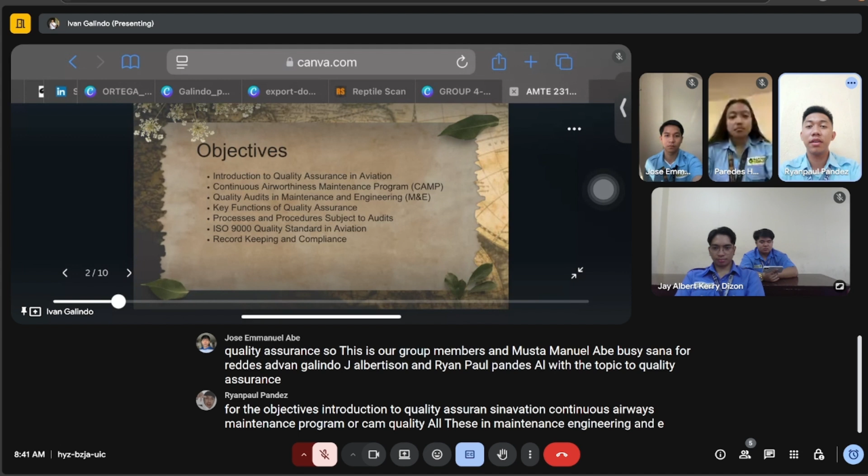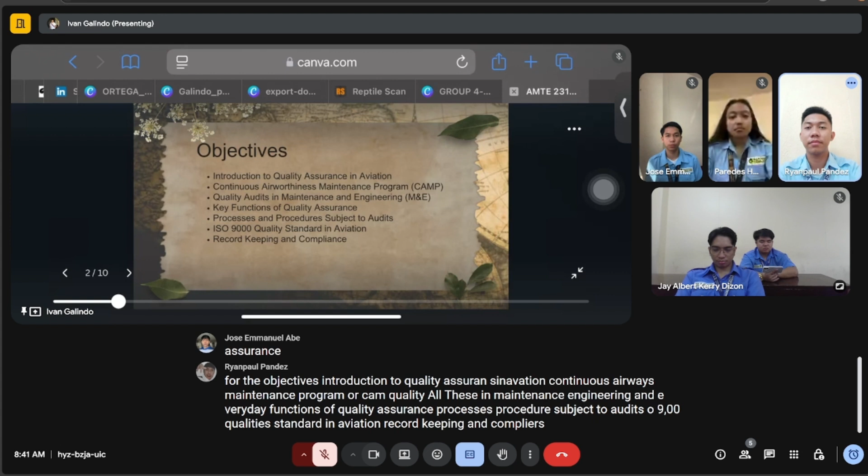For the objectives: Introduction to Quality Assurance in Aviation, Continuous Airworthiness Maintenance Program, or CAMP, Quality Audits in Maintenance and Engineering, M&E, Key Functions of Quality Assurance, Processes and Procedures subject to audits, ISO 9000 Quality Standard in Aviation, Record Keeping and Compliance. Next slide, please.

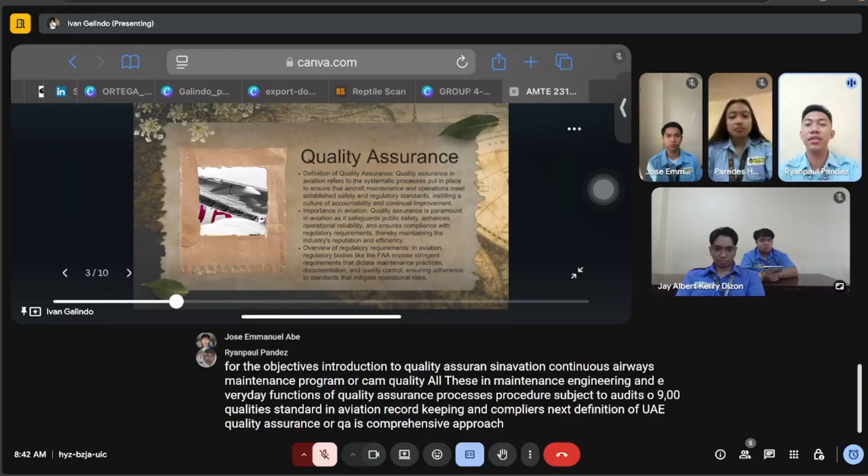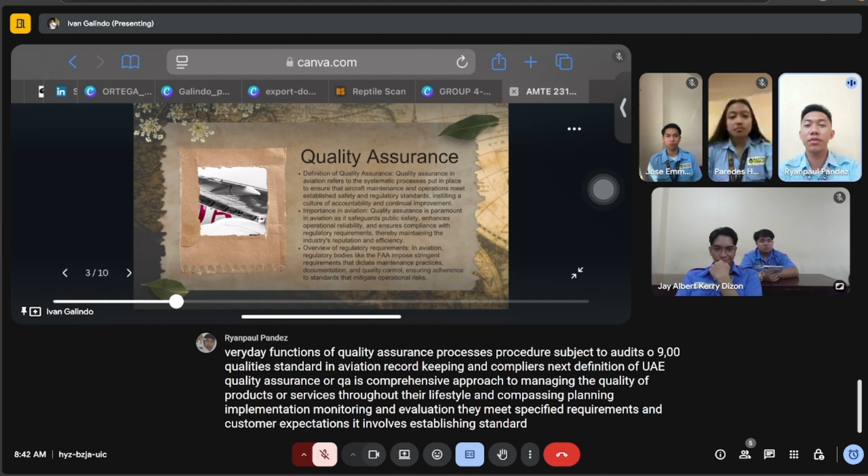Definition of QA. Quality assurance, or QA, is a comprehensive approach to managing the quality of products or services throughout their life cycle, encompassing planning, implementation, monitoring, and evaluation to ensure they meet specified requirements and customer expectations. It involves establishing standards, procedures, and processes to prevent defects and other issues before they arise, ultimately aiming to provide confidence to stakeholders that a product or service is of acceptable quality.

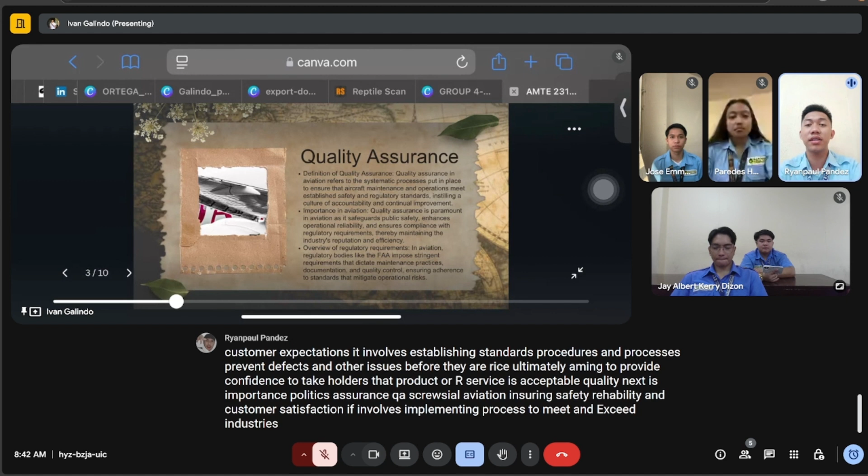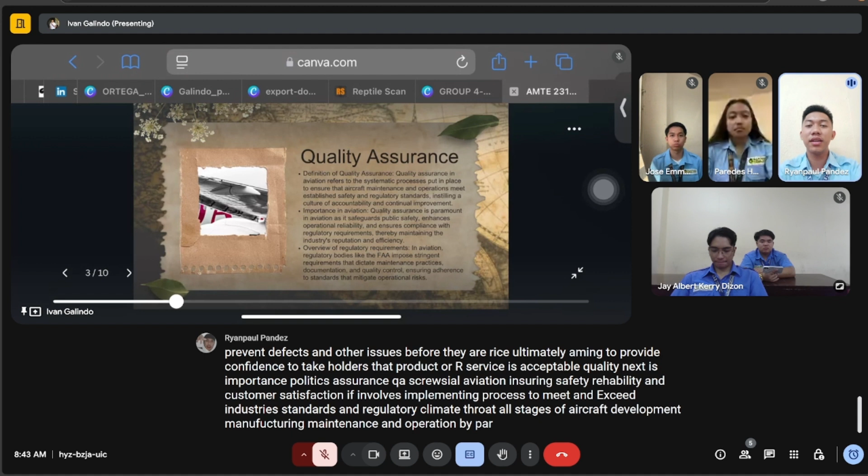Next is importance. Quality assurance, QA, is crucial in aviation, ensuring safety, reliability, and customer satisfaction. It involves implementing processes to meet and exceed industry standards and regulatory requirements throughout all stages of aircraft development, manufacturing, maintenance, and operation. By prioritizing QA, aviation companies can enhance safety, build trust, and maintain a competitive edge.

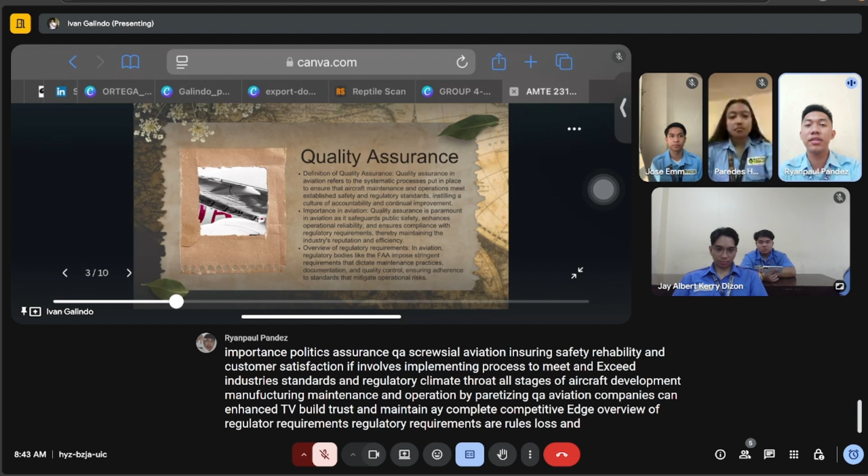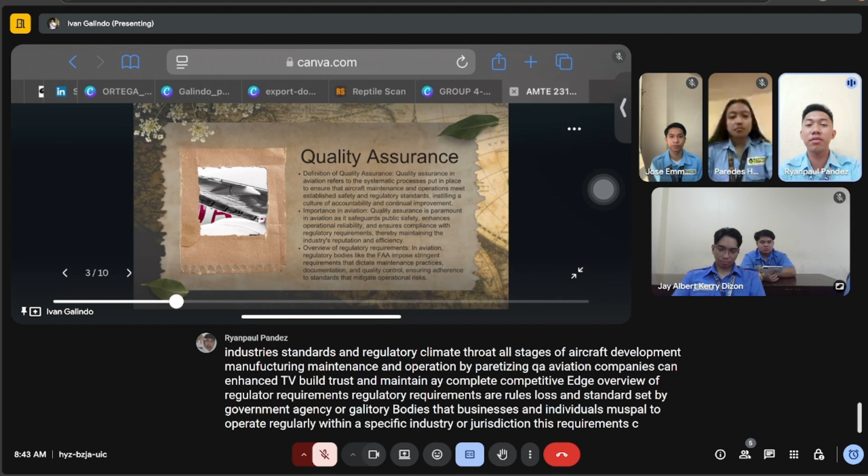Overview of regulatory requirements. Regulatory requirements are rules, laws, and standards set by government agencies or regulatory bodies that businesses and individuals must follow to operate legally within a specific industry or jurisdiction. These requirements cover various aspects like safety, finance, environment, and operation.

Definition of CAMP. A Continuous Airworthiness Maintenance Program, or CAMP, is a structured maintenance program required by the Federal Aviation Administration (FAA) for certain aircraft, including fractional ownership aircraft, commercial operations, and large aircraft. It ensures that aircraft remain airworthy and comply with regulatory requirements by establishing systematic maintenance, inspection, and record-keeping procedures.

Next slide, please. Roles of OpSpecs. Operation Specifications, OpSpecs, serve as a detailed authorization document issued by the FAA, granting permission for an air carrier to operate and defining specific operational requirements, conditions, and limitations. They essentially spell out how an airline complies with various parts of the FAR, or Federal Aviation Regulations, and provide guidance to all affected employees, management, and the FAA.

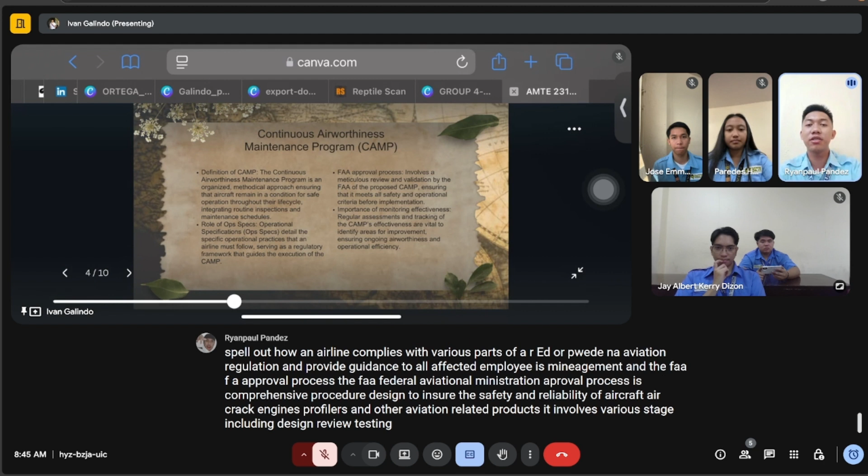FAA approval process. The FAA, Federal Aviation Administration, approval process is a comprehensive procedure designed to ensure the safety and reliability of aircraft, engines, propellers, and other aviation-related products. It involves various stages including design review, testing, and inspection, ultimately leading to certification or approval that allows safe operation and use in aviation.

Next is importance of monitoring effectiveness. Regular assessment and tracking of the CAMP effectiveness are vital to identify areas for improvement, ensuring ongoing airworthiness and operational efficiency.

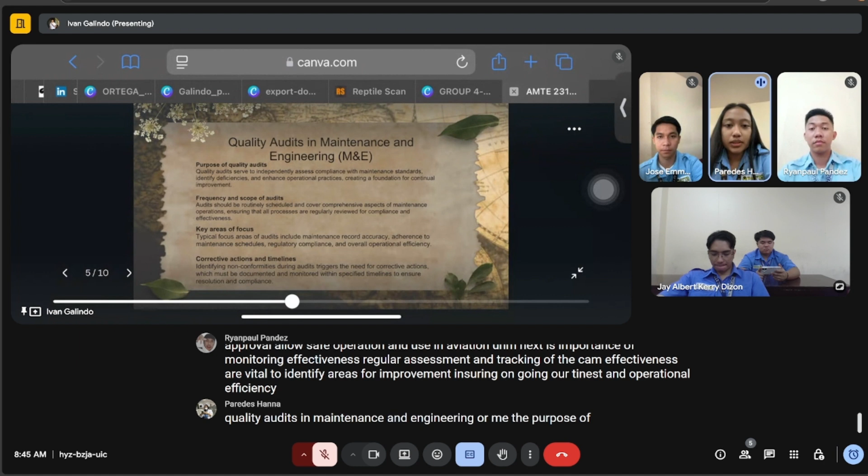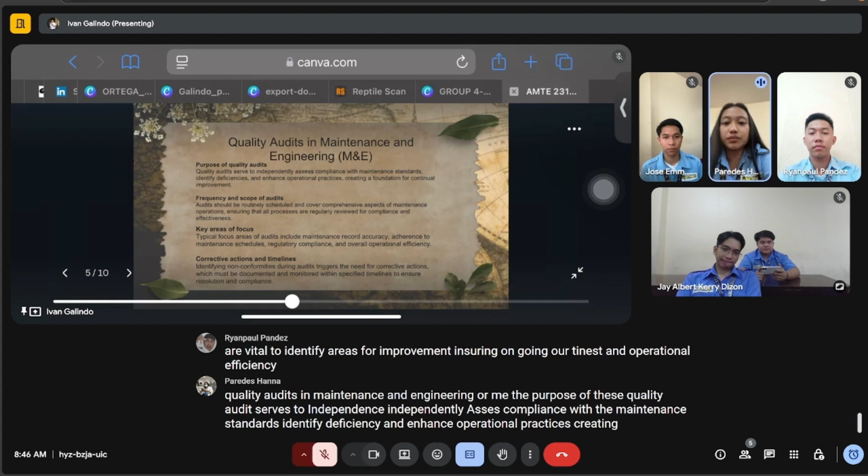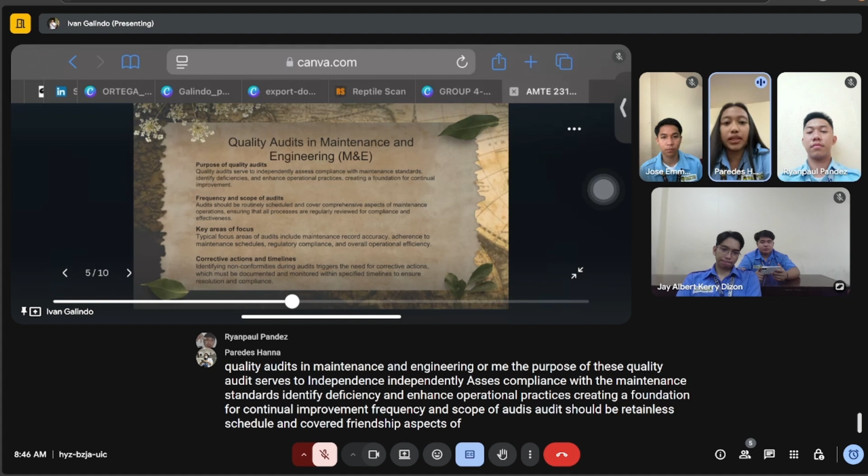Quality audits in maintenance and engineering, or ME. The purpose of this quality audit is to independently assess compliance with the maintenance standards, identify deficiencies, and enhance operational practices, creating a foundation for continual improvement. Frequency and scope of audits. Audits should be routinely scheduled and cover comprehensive aspects of maintenance operations, ensuring that all processes are regularly reviewed for compliance and effectiveness.

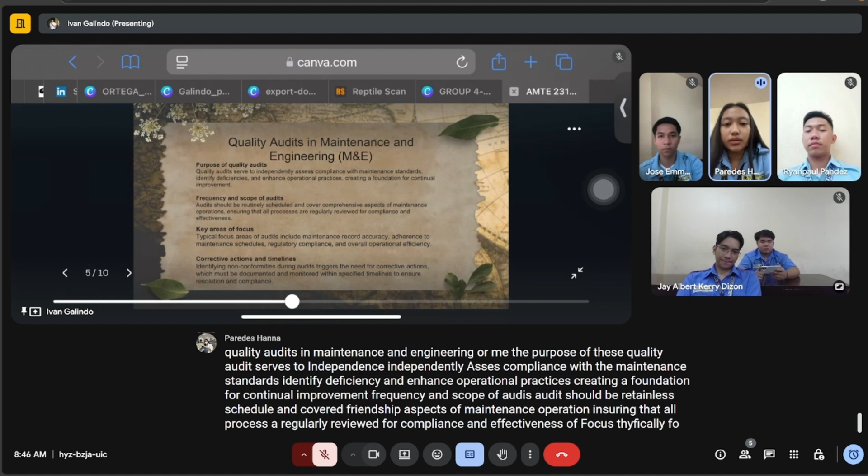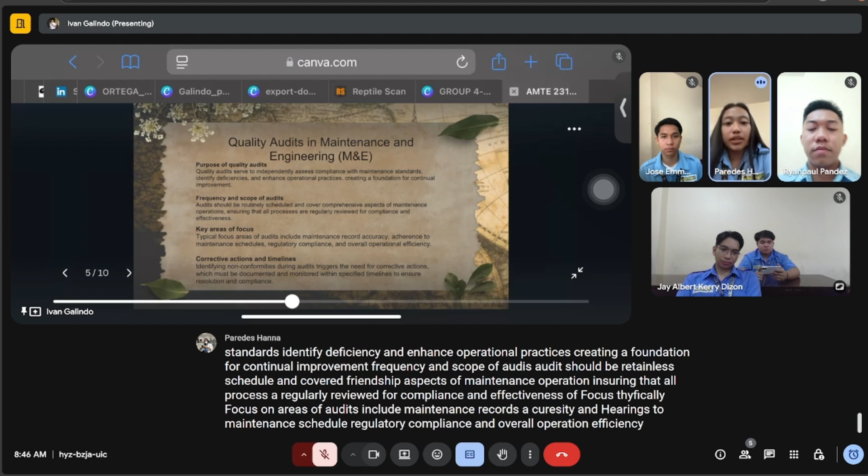Key areas of focus. Typical focus areas of audits include maintenance records accuracy, adherence to maintenance schedules, regulatory compliance, and overall operational efficiency. Corrective action and timelines. Identifying non-conformities during audits triggers the need for corrective actions, which must be documented and monitored within specified timelines to ensure resolution and compliance.

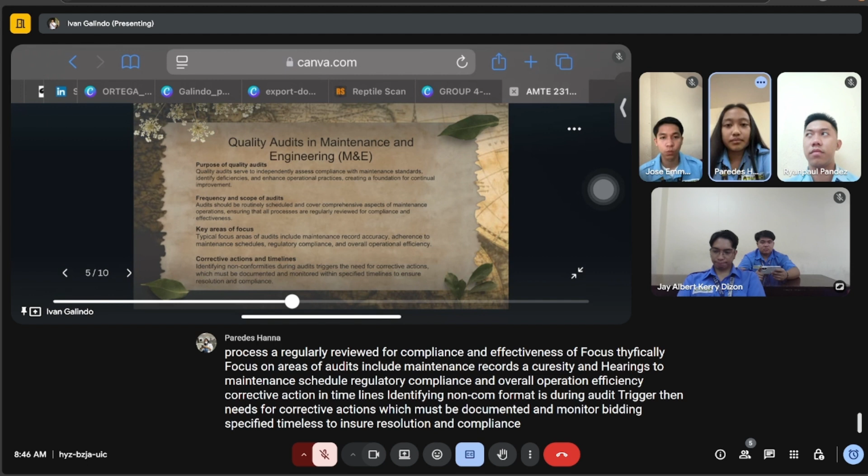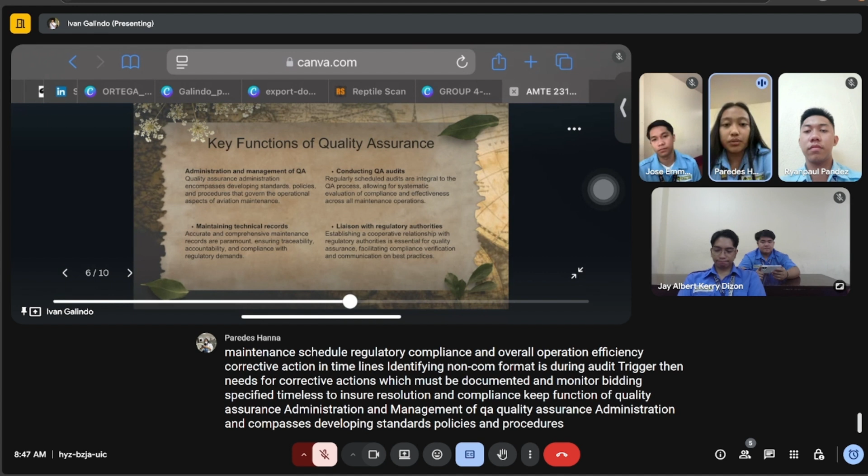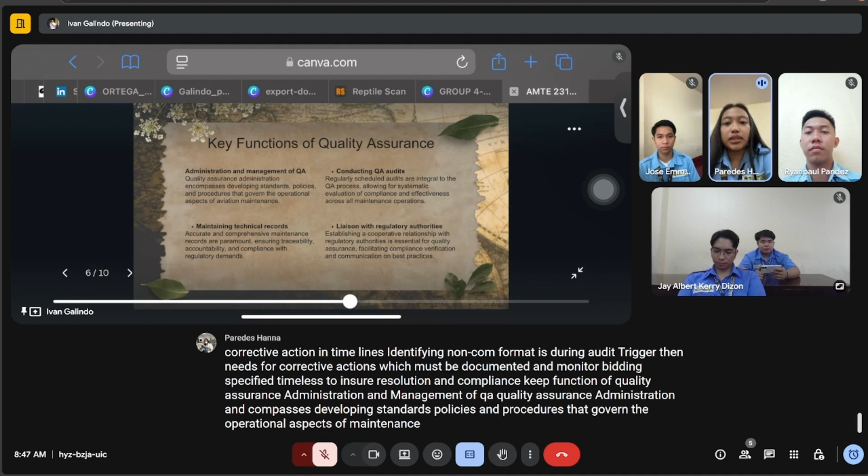Key functions of quality assurance. Administration and management of QA. Quality assurance administration encompasses developing standards, policies, and procedures that govern the operational aspects of aviation maintenance. Conducting QA audits. Regularly scheduled audits are integral to the QA process, allowing for systematic evaluation of compliance and effectiveness across all maintenance operations.

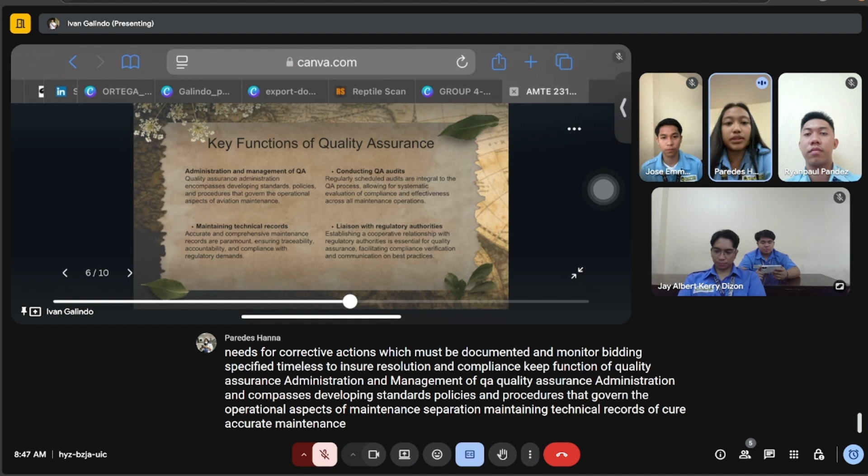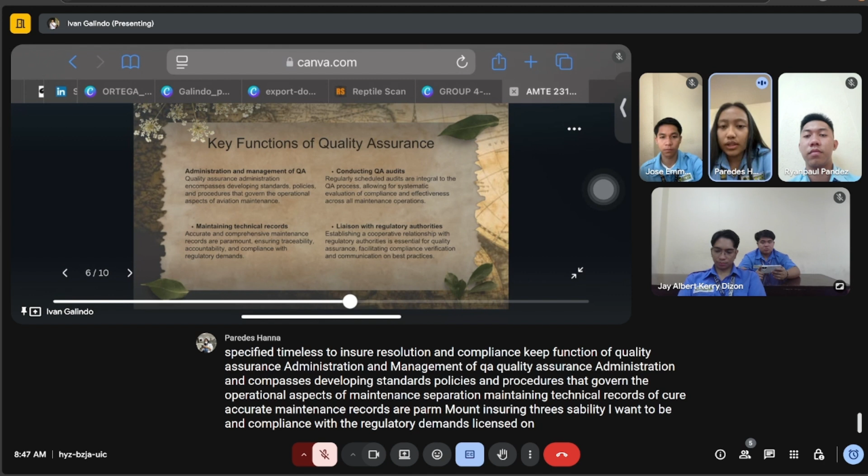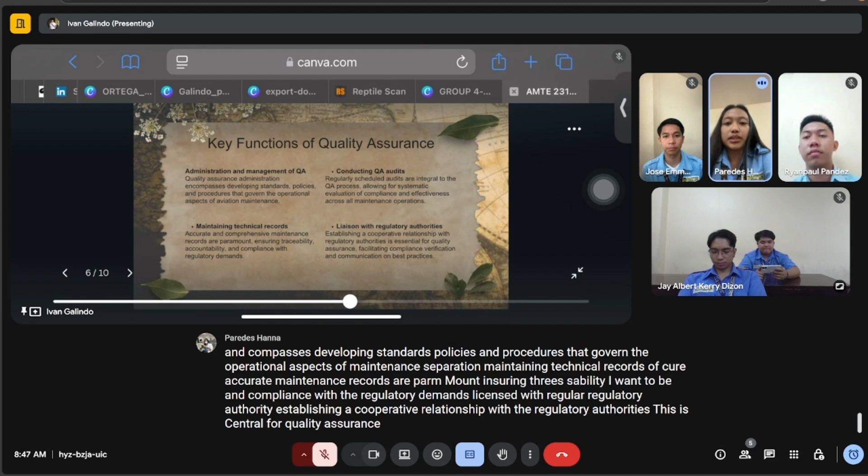Maintaining technical records. Accurate and comprehensive maintenance records are paramount, ensuring traceability, accountability, and compliance with the regulatory demands. Liaison with regulatory authority. Establishing a cooperative relationship with regulatory authorities is essential for quality assurance, facilitating compliance verification and communication on best practices.

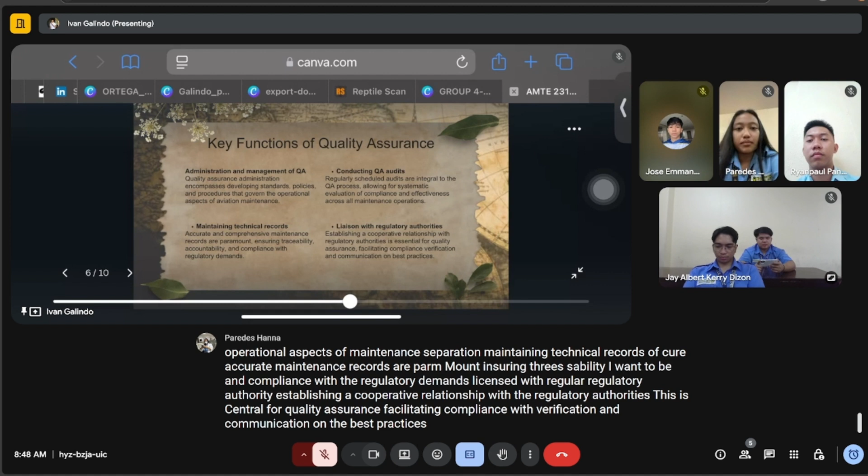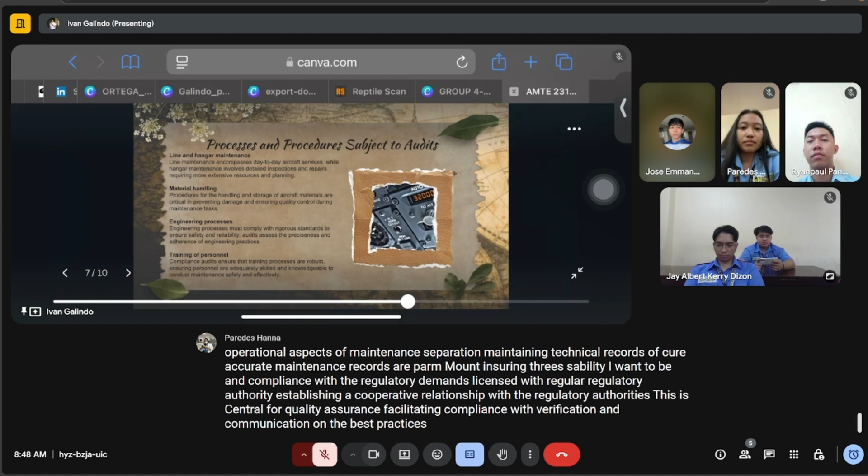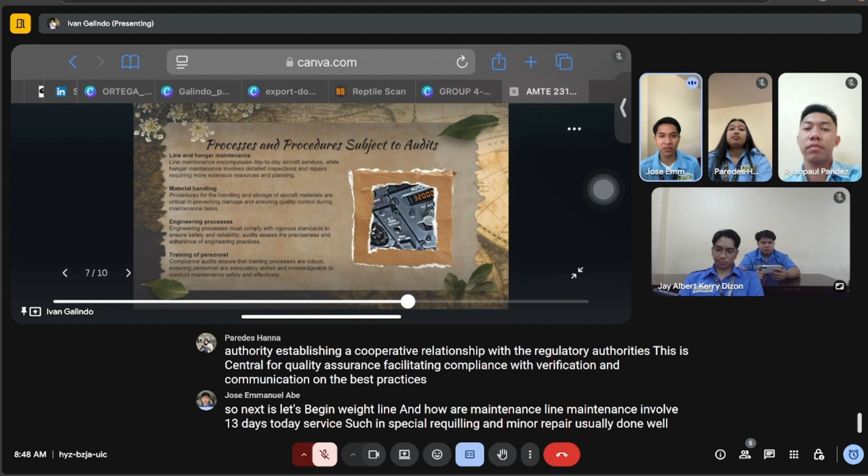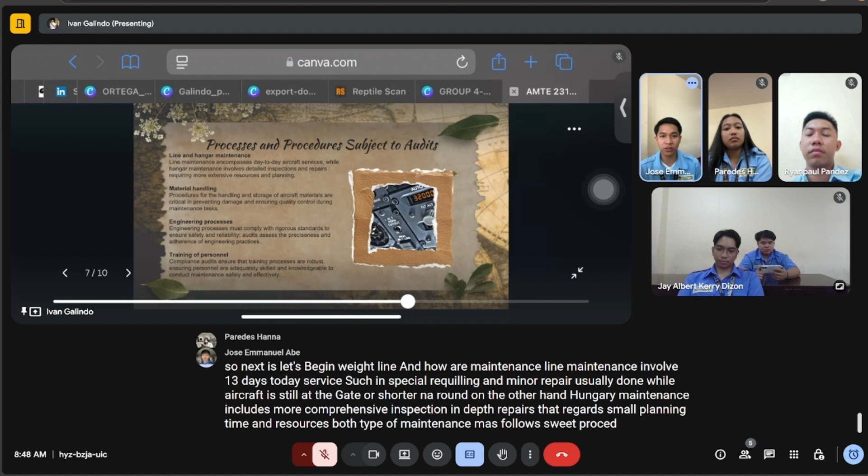So next, let's begin with line and hangar maintenance. Line maintenance involves routine day-to-day service such as inspection, refueling, and minor repairs, usually done while the aircraft is still at the gate or on a short turnaround. On the other hand, hangar maintenance includes more comprehensive inspections and in-depth repairs that require more planning, time, and resources. Both types of maintenance must follow strict procedures and are often audited to ensure safety and compliance.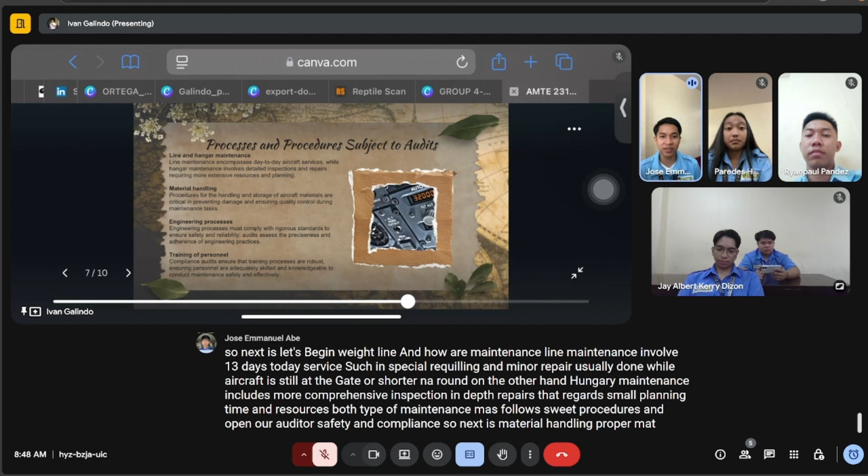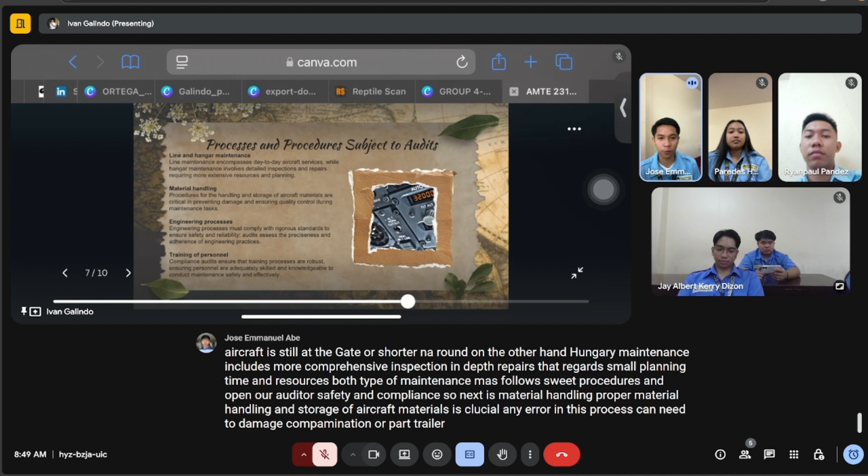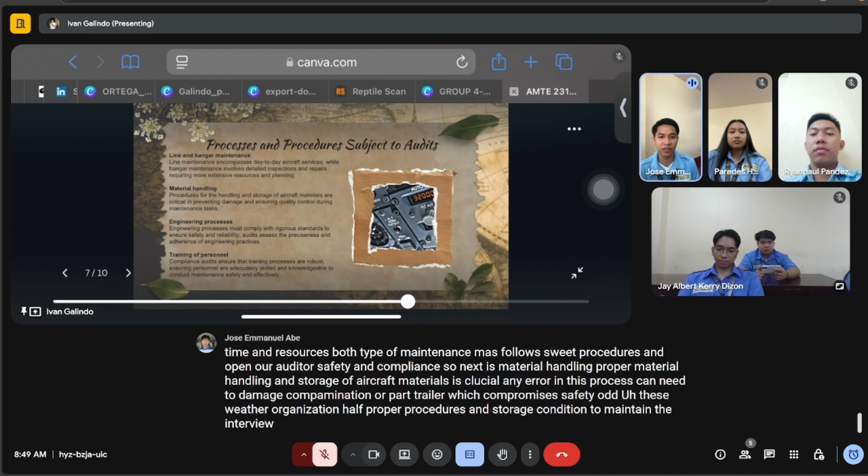So next is material handling. Proper material handling and storage of aircraft materials is crucial. Any error in this process can lead to damage, contamination, or part failure, which compromises safety. Audits check whether organizations have proper procedures and storage conditions to maintain the integrity of the materials used in maintenance.

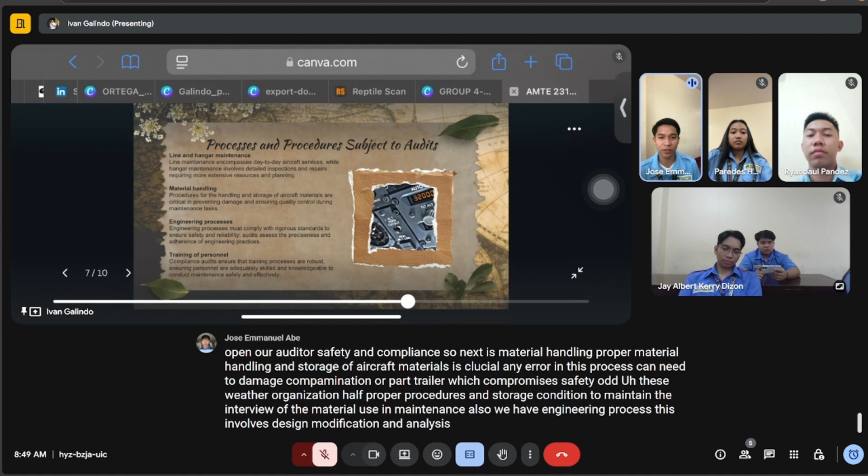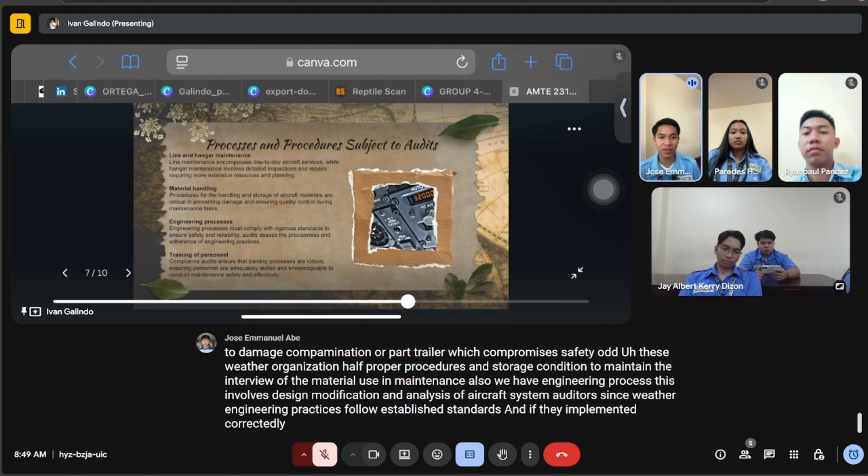Also, we have engineering processes. This involves the design, modification, and analysis of aircraft systems. Auditors assess whether engineering practices follow established standards and if they are implemented correctly. Compliance is essential for aircraft reliability and performance.

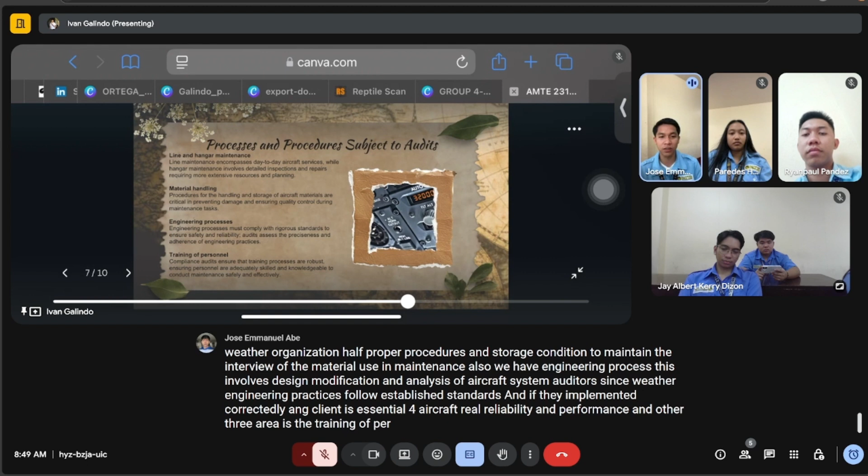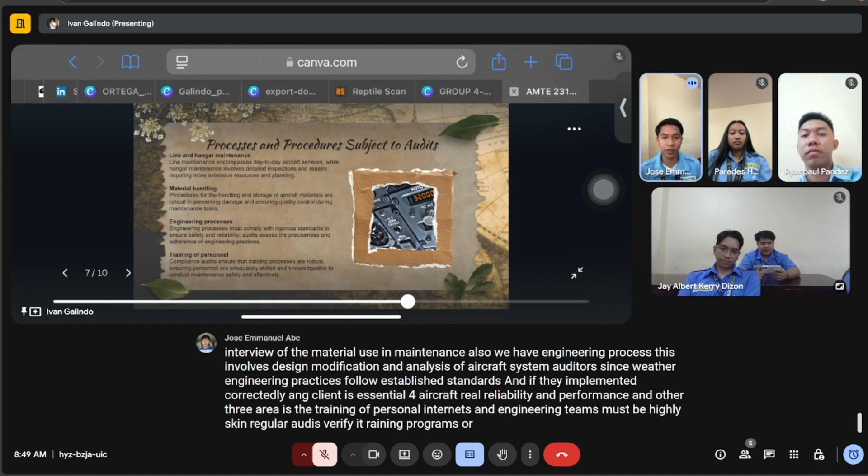And the other key area is the training of personnel. Maintenance and engineering teams must be highly skilled. Regular audits verify if training programs are effective and up to date, ensuring that all personnel are qualified to perform their roles safely and efficiently. Next.

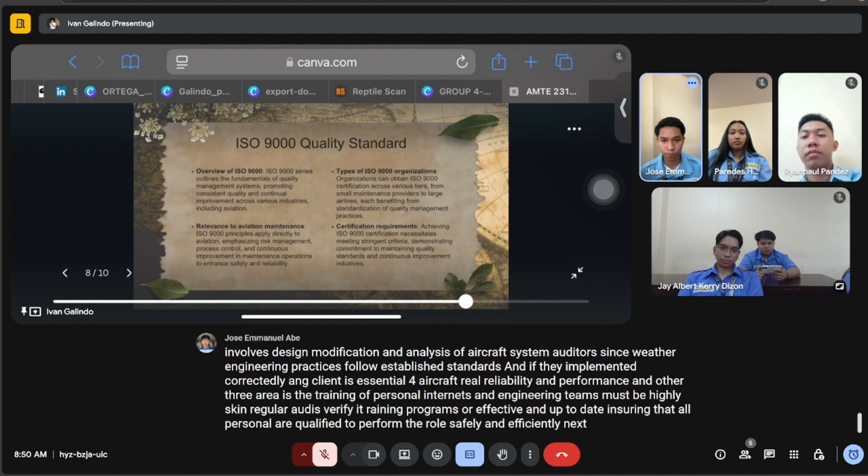So now let's talk about the ISO 9000 quality standard. The ISO 9000 quality standard is a globally recognized framework for quality management. It helps organizations establish consistent processes and encourages continuous improvement. In aviation, ISO 9000 is extremely relevant. It supports process control, risk management, and standardization, all of which are vital in maintenance operations.

Organizations of all sizes, from small MROs to major airlines, can be certified under ISO 9000. To get certified, they must meet strict criteria demonstrating their commitment to high standards and continuous improvement. Moving on to record keeping and compliance next.